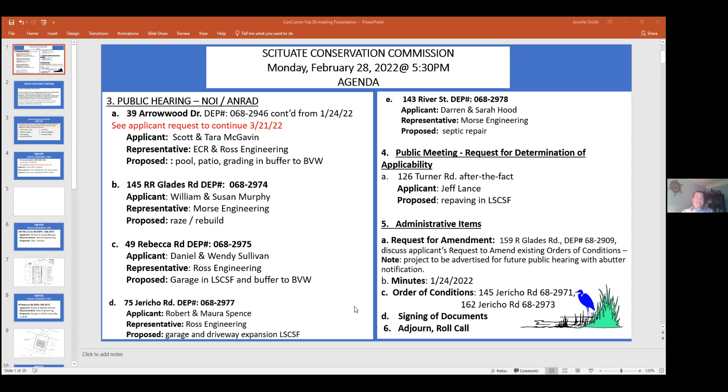So does that mean that there's a building in back of the rear building? You have an RR? We have Greg Morse on the call for this. Okay, good evening, Greg. Good evening.

For the record, Gregory Morse, registered engineer, Morse Engineering, representing the applicant and property owner, William and Susan Murphy. This is a notice of intent associated with the raze and rebuild of a single family home at 145 RR Glades Road. The property itself is relatively small, 2,736 square feet. It has an existing home on it. It's located in several resource areas, being a coastal dune on Glades Road, land subject to coastal storm flowage, a FEMA zone AE at 15. For reference, the site is at approximately elevation 9 and 10.

And then off the western portion of the site, at the bottom of the page here in blue, we've highlighted the edge of the salt marsh grass just off the property. So the proposal here is to take down the existing home and construct a new one. It's largely in the same location. The new home would be constructed on wooden piles. It would be brought into FEMA compliance. The first floor elevation would be proposed at elevation 16, providing a 1-foot freeboard to the floodplain elevation.

Also included with this would be construction of a new septic system. The septic system at the site today is likely Title V non-compliant, but the new septic system would consist of a Hoot aerobic treatment tank, a pump chamber, and a pressure-dosed leaching field. We were able to get the leaching field outside of the 50-foot buffer zone. The leaching field would be located under the new house, since the house is elevated up on pilings itself. DEP had no comments with this. I'd turn it over to you for questions or comment.

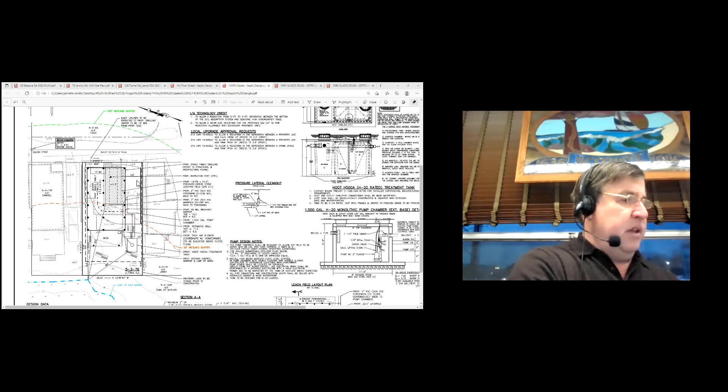I think I'm good. Seeing that we have the piling plan, we know there's no other structures or anything, I wouldn't be opposed to closing it. We could make it pending the rest of the structural information for the Board of Health.

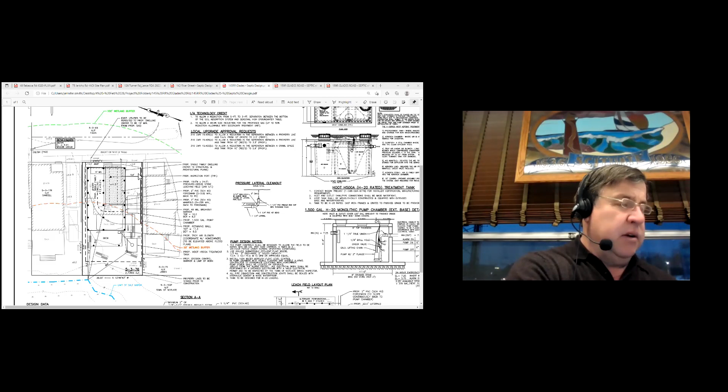If anybody wants to, I'll make a motion. Amy, are you good with that? Yes. So, make a motion to close pending waiting for the Board of Health and the structural plans to come in.

Motion from Penny. Do we have a second? Second from Jen. Great, all in favor? Richard, yes. Andy, yes. Brendan, yes. Frank, yes. Great, thank you very much.

Okay, 49 Rebecca Road. On February 28, 2022 at 5:30 PM in the Town Hall, the Scituate Conservation Commission will hold a wetlands hearing under Chapter 131, Section 40 of the Mass General Laws and Section 30700 Town of Scituate Code of Bylaws regarding the application of Daniel and Wendy Sullivan for work related to building a detached garage for a single-family dwelling at location 49 Rebecca Road, Scituate. Abutters and other interested parties are invited to attend. Information to access the virtual meeting is available in the agenda posted on the town website.

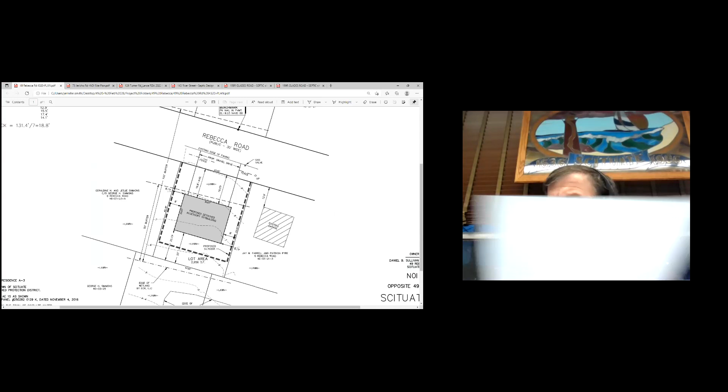Frank, I have Paul Mirabito on the line for this. Okay, hi Frank, good evening, Paul. Good evening. The applicant

resides on the opposite side of the street as the proposed accessory outbuilding at 49 Rebecca Road. The parcel in question is a vacant parcel of land with 2,956 square feet. It's been historically maintained as a lawn and a small garden area. On the southwest side of Rebecca Road, as you can see in photographs, there are several existing dwellings and garages there at the present time.

To the rear of the lot, there's a vegetated wetland line that was delineated by Brad Holmes, based upon soils and the groundwater. To the rear of that is a degraded old salt marsh, which has been overtaken by the Phragmites.

To the southwest of the locus, there's lawn areas on the abutting properties. The photographs I included in the notice of intent show that this site in question is an area where they also store the boats for winter storage. There's a construction trailer there as well.

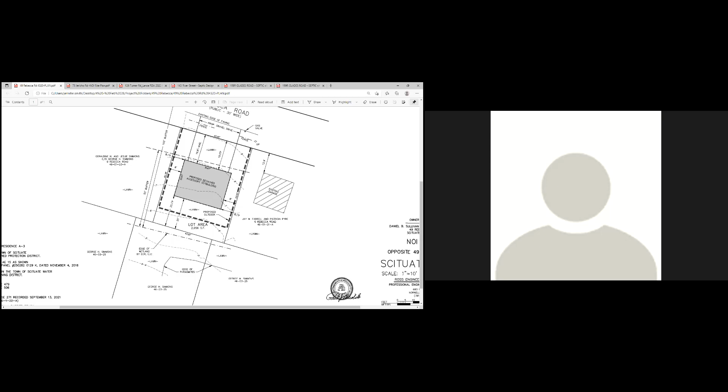Okay. Paul, I got a bit distracted there for a second—what did you say this is going to be built on? I'm just seeing a square. In an AE zone, I believe I submitted some structural plans for that. Just give me a second here. Yeah.

Frank, it's AE 15 mapped. No, the structural plans weren't in, but they're proposing to put it on a reinforced concrete foundation with a slab, as it's in an AE zone where there are no performance standards. The top of the garage slab would be approximately 1 foot above the street elevation, to give it slope back out to the street.

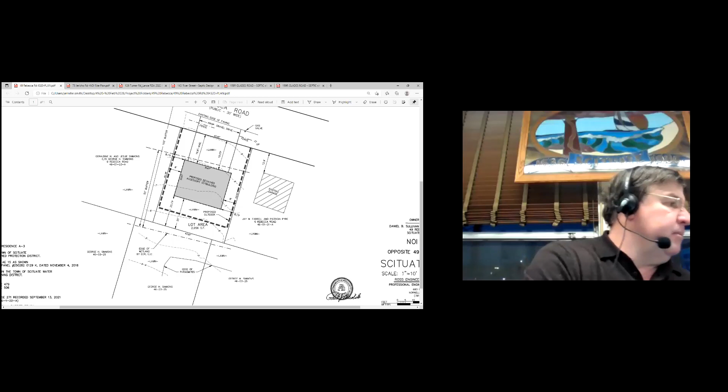The lot slopes from the street back to the rear of the lot. The street's at about elevation 8.5 to 9, and the back of the lot is at elevation 6. So I need to bring in fill to raise the lawn area.

The land around the garage will remain as lawn, with the exception of the proposed driveway coming into the garage, which is a gravel driveway. The placement of the garage would only allow parking of 1 or 2 cars in front of it, whereas now they're parking several boats and other vehicles on the property throughout the year, especially in winter, as the photographs show. But once the building is there, the only parking would be inside and in front of the garage.

Penny: Thanks, Paul. That's a big garage. Actually, it's 30 foot 8 inches by 23 feet 8 inches.

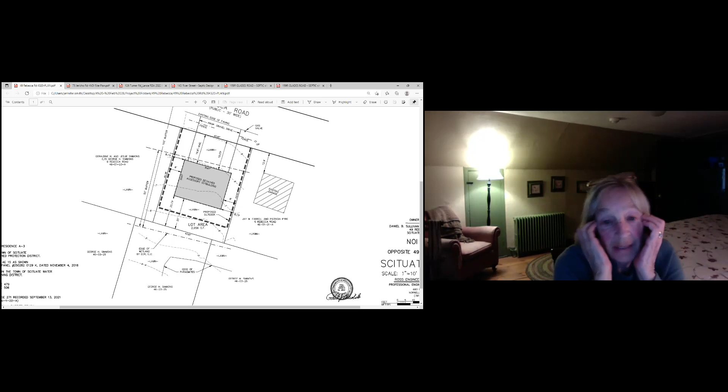To me, that's big. You look at the garage next door. But anyways, I don't know, I know there's other ones over there. I don't know if it's a good idea or a bad idea. I know every storm it's going to be flooded. It goes right into the marsh, the wetlands, whatever you want to call it, between the houses on the front and back of the harbor. I don't know, I'm just going to pass. I don't know if it's a good idea or not.

Jen: I would echo Penny's sentiments and would just want Amy to have the opportunity to do more due diligence on it.

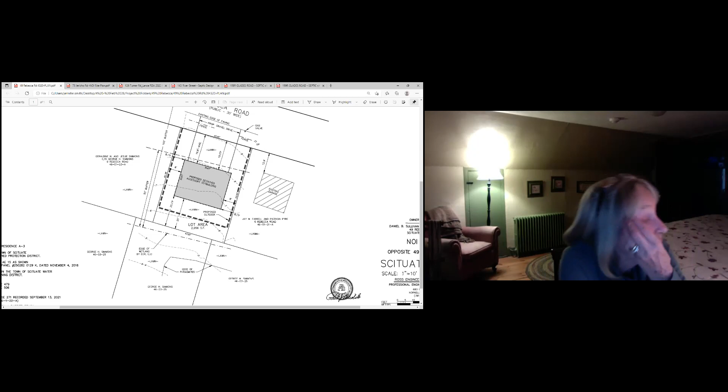Andy: I feel like I'm fairly consistently hesitant about these storage units in flood-prone locations, and this is the biggest one I've seen yet. So I guess I've heard the concerns about it, and I share them.

Brendan: Yeah, I agree with everyone that I'm concerned about this. I don't know that it's a very good idea. But I don't have any specific questions at the moment.

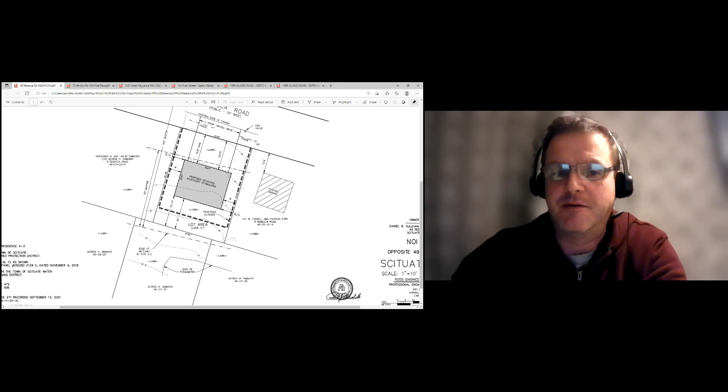Okay, so Amy, what you alluded to, maybe confirming the resource area, wetlands line.

I think I would start my approach with a little more diligence on the flood hazard area. Because if this area is really actually in the limit of moderate wave action, which isn't on the plan, it shows that it's right on the edge, but if it really is within that LiMWA area, then it wouldn't be a question about whether or not it would be permitted. Another thing that's missing is sediment information, as far as whether this is sandy underneath or more till. So I'm not sure exactly what the resource area is.

So that goes for accuracy of the resource area, and also proximity of the buffer to the BVW. Looks like that area, given it weren't filled on that side of Rebecca, that probably that entire stretch would go to the road. The literature and studies that the town has performed in this area all show that this area is going to be under water on a regular high tide cycle in the not so distant future. So permitting a new accessory building in this area would not be the best decision.

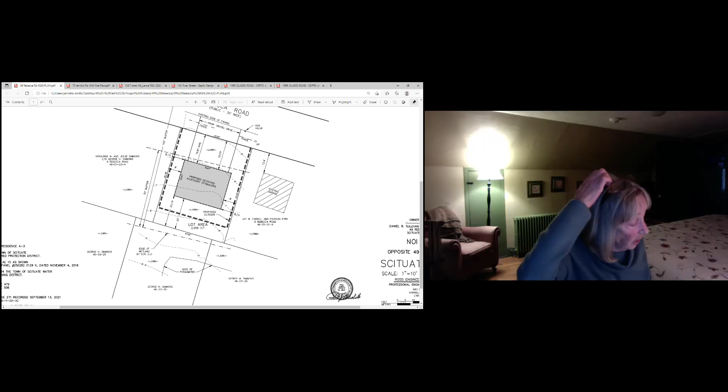Well, a lot of these structures, Penny, were for sure totally demolished in '78. Oh yeah, that was interesting. And in fact, the owners of this property - the Cape directly across the street - is on a solid foundation, but it was rebuilt in '78 following that storm after they lost the house there. But I don't think records show there was ever anything on this lot. No, and there's a number of other empty lots on Rebecca on this side of the street.

All right, Frank, what are your questions? It's also in the Scituate floodplain, which is a zoning reg.

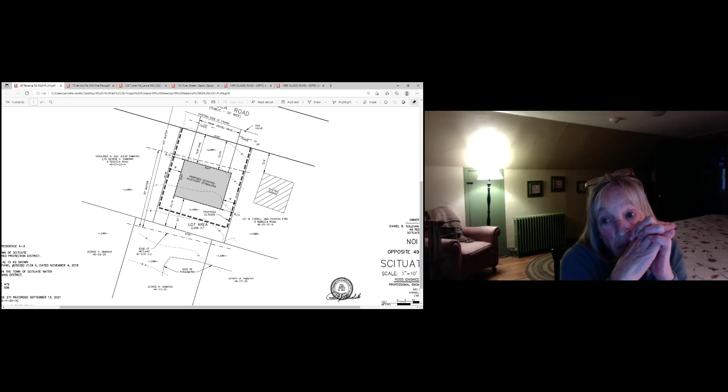So Paul, does that impact, Amy? Well, the Scituate floodplain watershed protection district says anything less than 12 feet is not buildable, not permitted to be built upon.

I know, Paul, if I can interrupt, that's not correct, building commissioner. Paul, let Amy finish and then you can address that.

Well, okay, anyways, there's a map, and if you're in this area of the watershed or floodplain, and you're mapped in that area, then there's special provisions that apply that would prohibit building. Oh, okay, thank you. Paul, do you want to respond to that?

Yes, I'd like to make a few comments. To respond to Amy's last comment, in the zoning bylaw, in the floodplain and watershed protection district, you can construct an accessory structure as a matter of right. That's in a separate paragraph in section 470.

The other thing I'd point out is that the first floor of this will be about a foot above the existing grade. There's no proposed living space in it. As such, the first floor does not have to be brought up to the AE elevation of 15. There would be breakout panels on the wall to let water flow in and out as required.

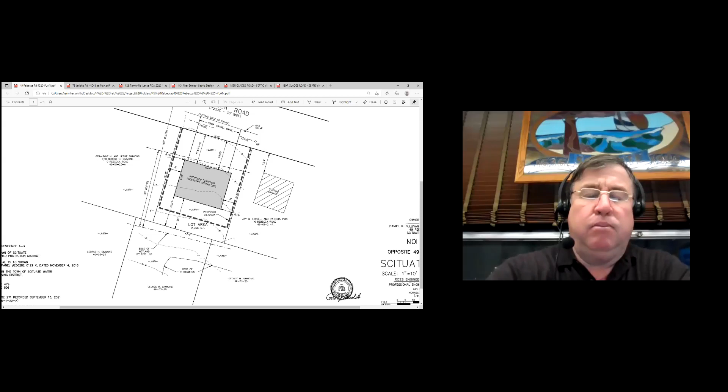So Amy, if we're going to ask Paul for additional information, I'm just wondering what we just... Well, sure, how about if you start with a site visit and reaching out to coastal for a technical opinion from CZM about the flood hazard area.

Well, and the flood hazard area has already been determined. I mean, that's been set by FEMA on their 2016 map, and it didn't change. The maps were revised this past summer, and there are no revisions made in this area.

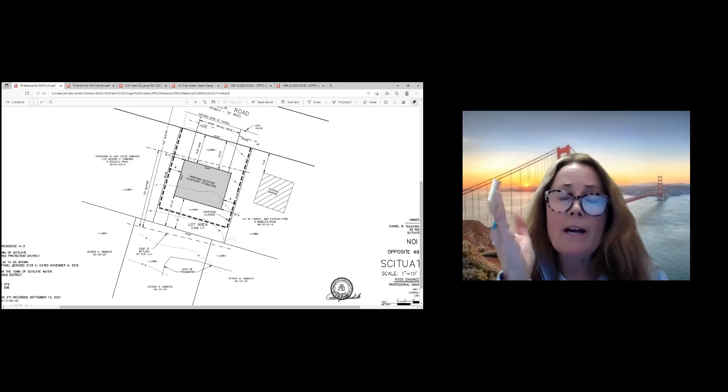I mean, again, actually, there are mapping errors, so I'm not sure if this is in an errored location, like it's faulty in this spot. So on-site evidence can overcome the FEMA panel.

And I'm not sure why CZM needs to get involved. I don't see any reason for it. I think this is a straightforward application. And again, this is in an area that's already been altered. It's been maintained as a lawn and a garden for several years.

The proposed building isn't going to alter the resource area. The runoff from that roof is clean water, and the surface of the ground is going to be kept the same as the lawn. So with the addition of the roof area with clean water versus the lawn, there'd be no degradation of the Phragmites, which you all know is a very invasive species. That's probably why some of the neighbors have been cutting it back over time. But this building would not have any negative impact or cause any alteration to the resource area to the rear of the property.

So Paul, this isn't on piers. This is a poured foundation with a concrete slab inside the building. Yes, that's the plan because it's in an AE zone.

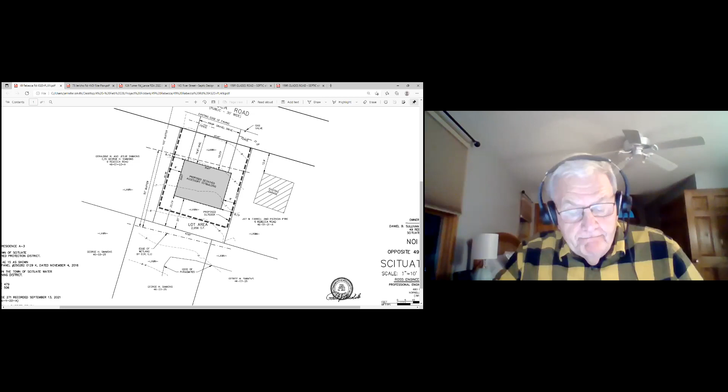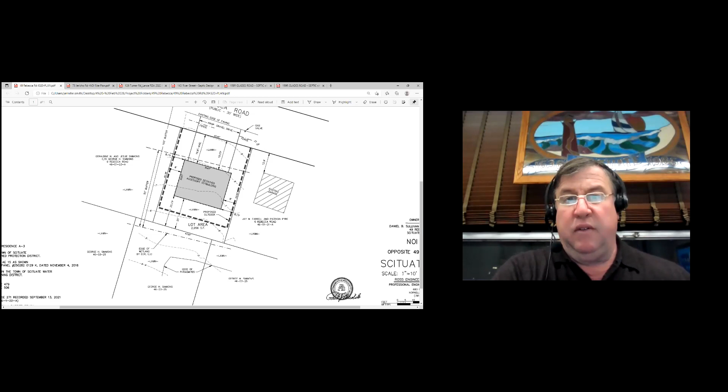Is that Richard? Yep. Okay, I feel pretty familiar with it already, but if it works, we'll be there. We don't have to do it formally. Anybody could take a ride by, but I'd like to maybe visit it with Amy and Paul if you could be around. Just seems like it would be good if Paul were there or somebody from your office. Yeah, I'd like to be there.

Well, I'd like to walk it, Frank. I mean, I drive by it all the time when I go out to the lighthouse, but I'd like to walk it. I'm just wondering, I don't like the slab at all. I think we need to take a little field trip. Thank you. All right, let's see what we can set up.

Is it relevant whether or not the accuracy of the flood hazard area — you know what I mean? Is it always true that the maps are accurate? What determines that, Amy? Is it an elevation line, or Paul, what makes that line? What gives us that? How do you delineate that?

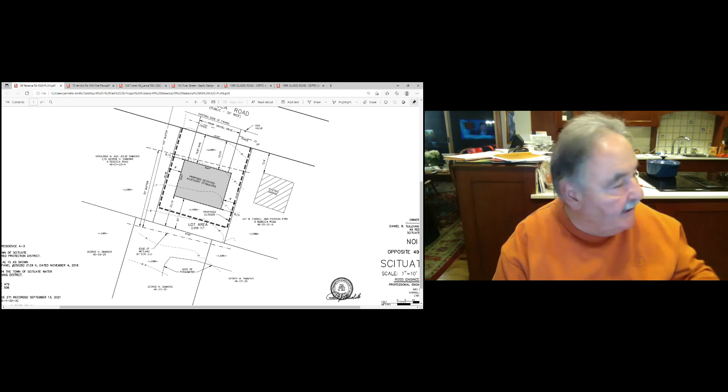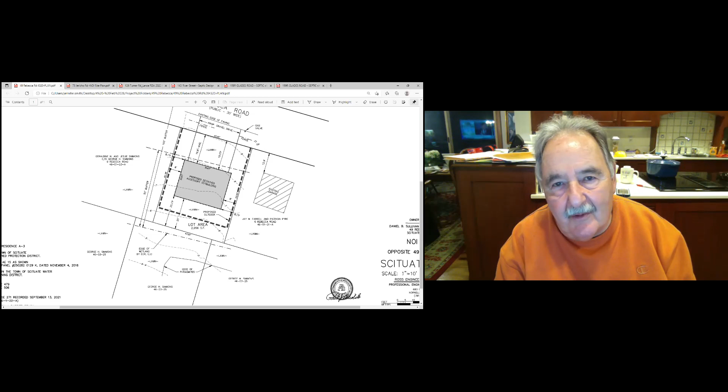The FEMA maps — that's the line on the map. It's not an elevation. The FEMA map shows this whole area to be in an AE zone. The line separating the velocity zone from the AE zone is on the other side of Rebecca Road. That's why we put the note on the plan, note number 3, saying that the locus is in zone AE 15. If the FIRM line or FEMA line went through the property or close to it, we would show that on the plan, but it isn't anywhere near this lot. It's on the other side of the road toward the ocean.

So when do you want to continue this to and try and get out there? April 4th? Okay, wait, you're saying continue this to April 4th?

Amy, that's what I'm saying, based on the volume of filings that we have in front of us. Yes, 4/4.

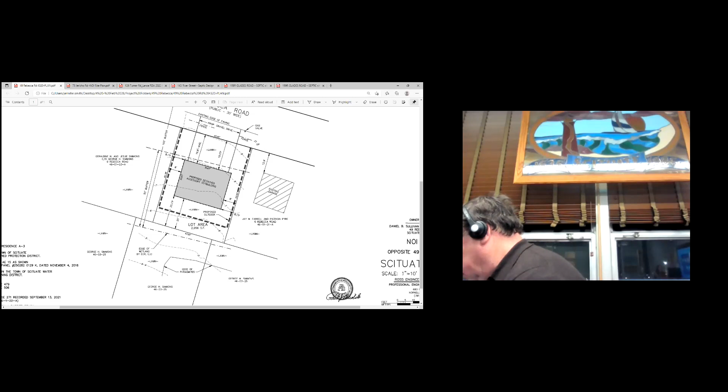What do we have for meetings? That would be 3 meetings away, Frank. So we have one next Monday as well, and then another one on the 3rd. Monday. All right, well, you don't think we can get that in before that?

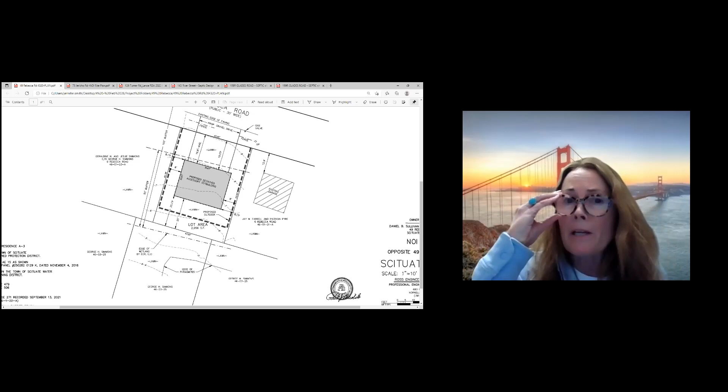Amy, we already have the agenda set up. We have our agendas set for the next couple of meetings, Frank. We have just been slammed with new filings. All right, well then, let's do it for the 4th and let's try to get something set up in the next couple of weeks, so we have time. And then if Paul needs to get some information, he can get it to us so that we don't have to push it out again.

Sounds good. Okay, so I'll make a motion to continue 49 Rebecca to April 4th.

Okay, that was Penny. Do I have a second? Second from Jen. Great. All in favor? Richard, yes. Andy, yes. Brendan, yes. Frank, yes.

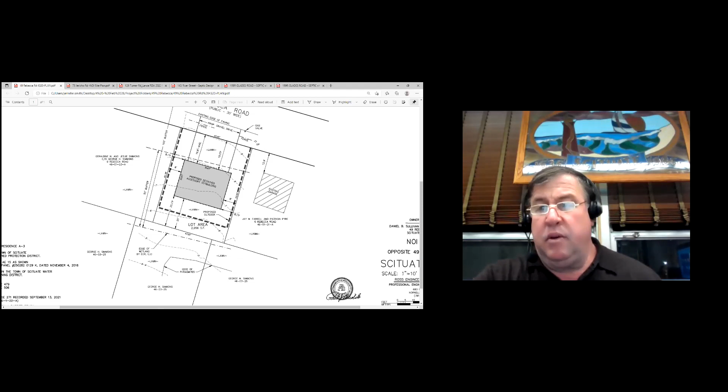Okay, let's maybe, Paul, you can reach out to Amy and me so we can get a time set up to go out there. Okay, thank you. All right, thanks, Paul.

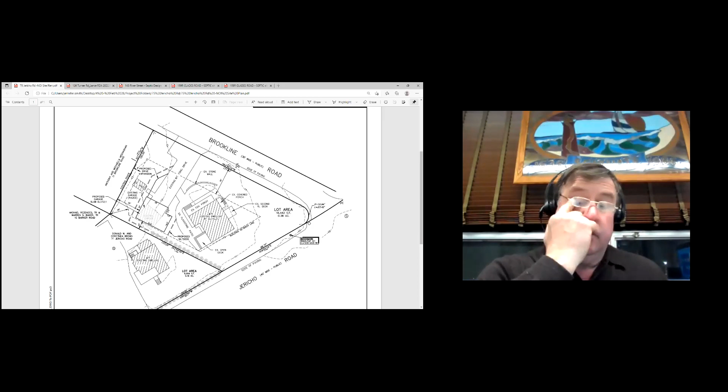Okay, thanks, Paul. Amy? I think this one's pretty straightforward, and no DEP comment. I don't have too much to say about this one. I mean, the structure will definitely need to meet coastal building code, but otherwise, probably okay.

Okay, who wants to go first? Andy? I think I'm good on this one. Brendan? I have no questions.

Penny? Yeah, the proposed extension of the driveway, that's going to be the same material, right? Yes. Okay, no, otherwise it's just a little bigger garage. It looks okay to me. Thank you.

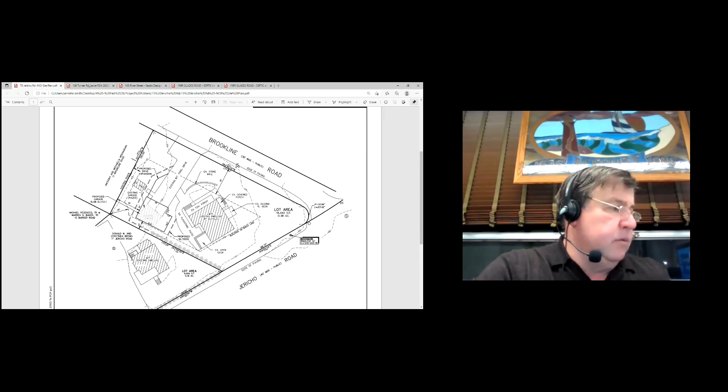Jen? Yeah, I think I'm okay. Richard? I'm okay also. Do we have anybody in the audience for this one? Doesn't look like it.

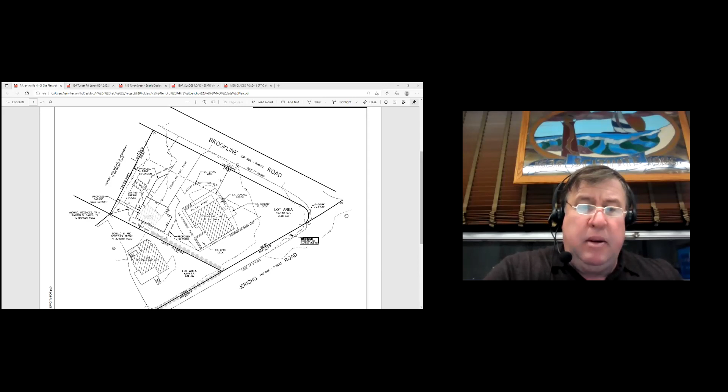Is there a locus for this one? Yeah, there's a locus map on the plan. Got it.

Just trying to get oriented with where they keep the docks and stuff for Scituate Marine. There was, and the fuel tanks on the other side of the road, Paul. I don't know if this is that. Maybe I'm in the wrong spot, I guess it's the other side. It's between Pearl Road and Jericho is where that's at. I got it. Okay, yeah.

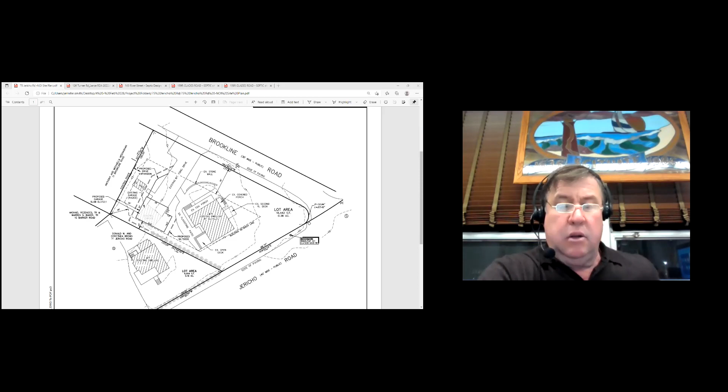Yeah, this is not in that location. This is in... no, that triangle, it's just above it. I get it. Okay. Just want to make sure Paul's looked it all over carefully. I don't want you to get lost, Frank. Yeah.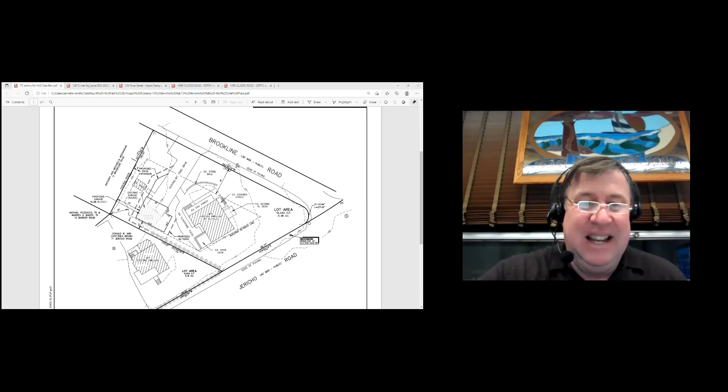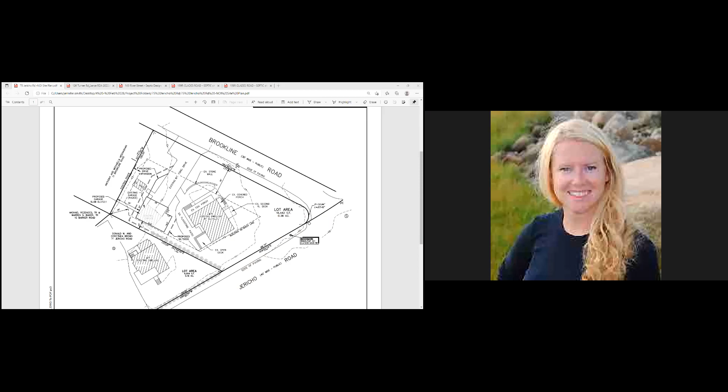All right, can we close it? You may. I make a motion to close. Second on that. I'll second it. Second from Jen. Oh, Richard beat me. Sorry, I'll take that one from Richard this time. So all in favor? Jen, yep. Andy, yes. Brendan, yes. And Frank, yes. Great. Okay, thanks, Paul. Thank you very much.

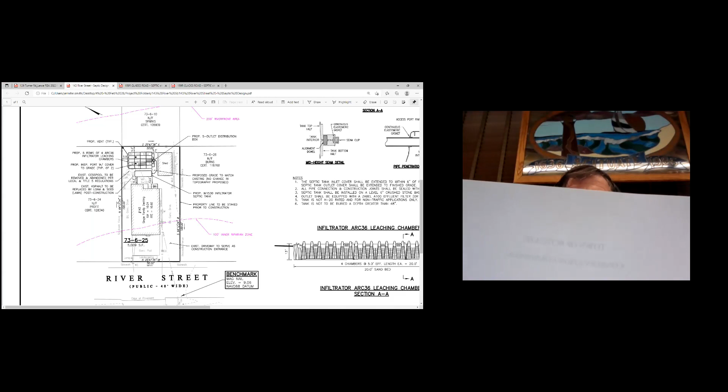143 River Street, on February 28th, 2022, at 5:30 PM in the Town Hall, the Scituate Conservation Commission will hold a hearing under Chapter 131, Section 40, Massachusetts General Laws, and Section 307.00, Town of Scituate Code of Bylaws, regarding the application of Darren and Sarah Hood for work related to a septic system repair for a single-family dwelling at 143 River Street, Scituate, Mass. Abutters and other interested parties are invited to attend. Information and access: the virtual meeting will be available on the agenda posted on the town website.

Wow, we've got Greg Morse on. I'm going to unmute him. Good evening, Greg Morse, registered engineer, Morse Engineering, representing the property owner, Sarah and Darren Hood.

This is a septic system repair project at 143 River Street, which is down in the Humarock section of town. Looking at the screen here, River Street's at the bottom of the page. Below River Street would be the South River, a tidal river, and extending off of that, highlighted in purple, are the 100-foot inner riparian zone and the 200-foot riverfront area. The existing site is relatively small, depicted by the black bold line. Existing home at the site has a failed septic system in the backyard. The proposal here is to put a new septic system in its place, consisting of a 1,500-gallon septic tank, a distribution box, and leaching chambers.

With respect to the wetland resource areas, septic system repair projects are exempt from the riverfront standards, and all of the work anyways is outside of the 100-foot inner riparian zone. Secondly, being in land subject to coastal storm flowage, this is in zone AE at elevation 14. For reference, the site exists at elevation 10. With the proposed septic system, we're not altering the grades at all. The finished ground surface matches the existing ground surface elevation at the site, so there's no change in topography. I would add that the area where the septic system is proposed is currently paved surface. We're actually removing that pavement when the septic system goes in, so the backyard would be replaced with just loam and seed, a grass surface, when the project is done.

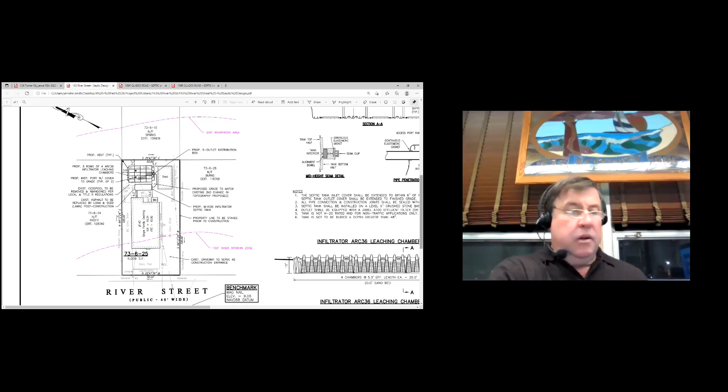Richard, there's your neck of the woods. Strictly from the standpoint of the improved septic, it's really good - very small lot, very tight. It is across the street from the river and behind another house. It's kind of the inland part of the beginning of the peninsula, and no, I don't have a problem with this particular part. Okay. Penny? No, I'm happy.

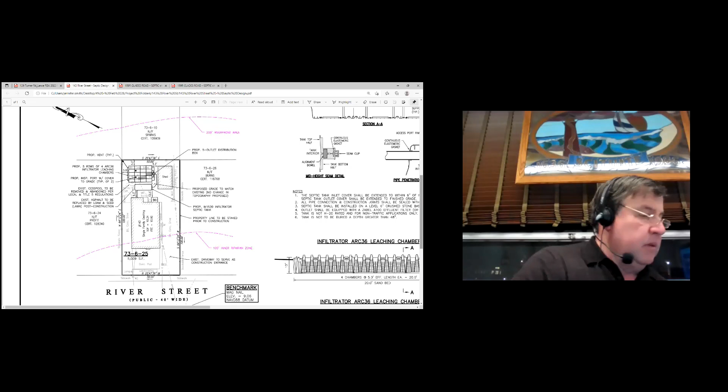Okay, Andy? It looks good to me. Brendan? Looks good.

Jen? Yeah, I guess I just had one question. Amy made a comment about the other side of the road that the same person owns not being in compliance. Just wondering how that might relate to this getting done, if they could be linked, or what the strategy might be there.

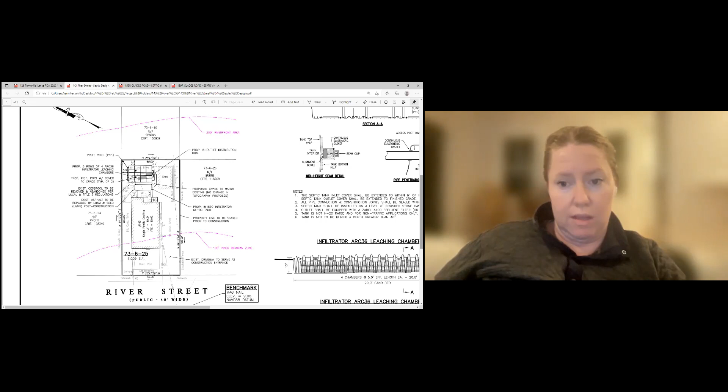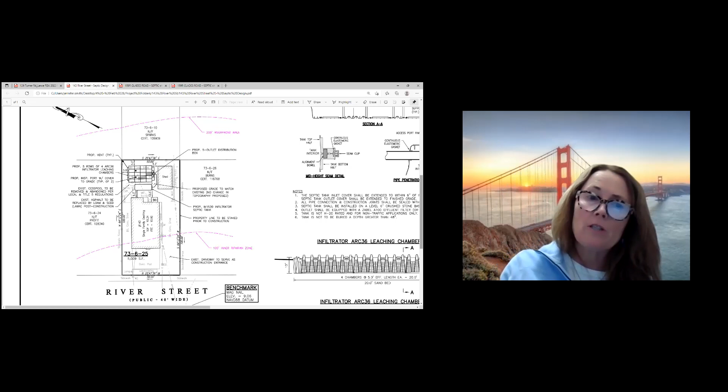No, Jen, not linked, but it would just be a good opportunity to bring up to the owners, because it looks like it's changed ownership, that any work on the river does require permitting. Anything seaward or on the other side of a wall is Chapter 91, so a waterways permit. So it's a good opportunity to have the conversation and engage so we can try to bring things into compliance across the street. Are they out of compliance?

Yeah, I mean, it looks like there's some sort of wall type thing going on, but I think that's also related to the neighbor.

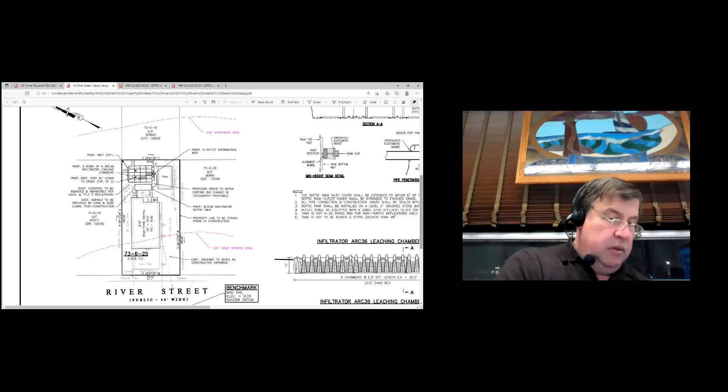Rich, would you think that most of that's been there a while? Well, the house is definitely old, that whole area. Yeah, Amy is right, it's probably from the 50s. And the same would be true across the street?

No, across the street, that house actually, I think - and I have to emphasize the word think - we had issues with the former owners of that house maybe 7 or 8 years ago when I was first on the commission. But I don't think it's the same owners, and I'm not sure that there's any new wall there. The wall that I can think of that's there is at least 10 years old and probably older.

Yeah, and we got no relief on that. That's correct, that's why I say, but I don't think it's these owners. They may own it now, but I don't think they did at the time. Yeah, the Army Corps of Engineers never came to our rescue on that one.

Correct. Yep. You remember that, Frank, when we had that issue? No, you and Penny must be - you remember it. It was there before I was. I thought you guys were eating more blueberries than I am or something.

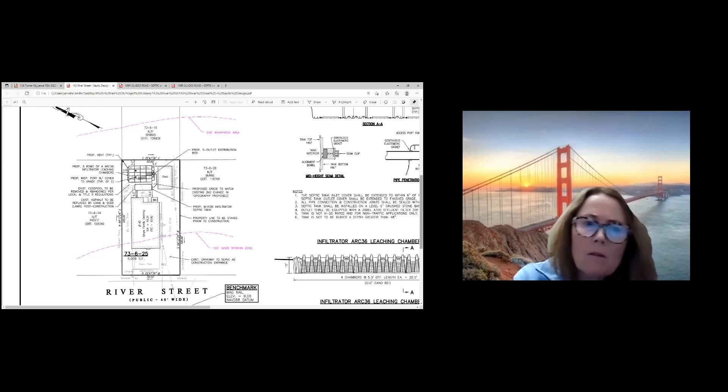Somewhere in this stretch, there's that illegal boat ramp that was put in, you know? Well, there's a concrete ramp that's showing on this plan. Yeah, well, that was there. But there was the wall behind the house. That's right, and there was a controversy about the Army Corps.

They weren't supposed to put it there, and they never did respond. Paul, when he was on the commission, had huge issues with that, and he was right because he watched them do it. Yep, and the Army Corps was supposed to come down and they never came.

I don't know now where the ramp is, and then south of there, this man's property, I have no idea what's going on there because I haven't been down there lately. No, there's been nothing recently that I know of.

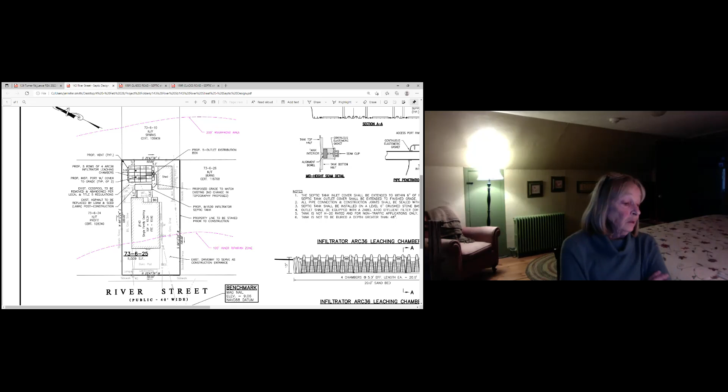Okay, but I think we also - I like the idea of Amy bringing this up on the one hand. On the other hand, this particular project across the street, separately, I just don't see an issue. Yeah, well, we could just tell them - yep, I think we just did - make sure you don't do anything over there unless you come to us.

I'll make sure the applicant's aware of that. Thank you, Greg. Greg, I got a few questions. I mean, I'm looking at this lot and almost the whole lot is either concrete or asphalt. That's correct, it's paved from one property line all the way to the other. The entire lot is paved.

Out to the street. Yep, right out to the street, right to the rear lot line. So Frank, we're removing the asphalt where the septic system's going and putting in grass in the backyard. Oh boy. So from the back of the house, you're gonna have to remove the asphalt for the tank and up to the shed. So that whole corner from the back of the house to the property line will be a grass surface.

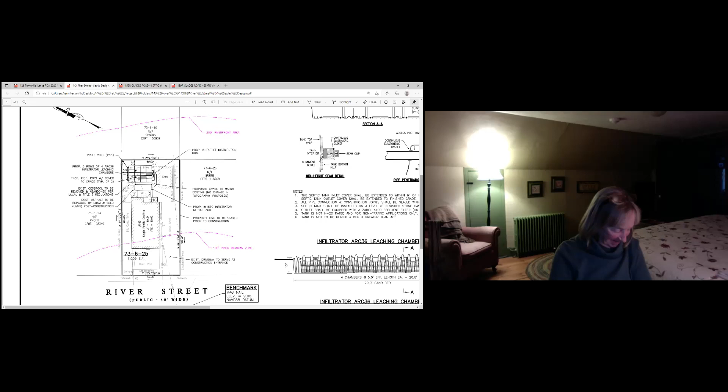What is an IM 1530 infiltrator septic tank? That seems different than - it's a plastic septic tank as opposed to a concrete septic tank. Oh, just because access to the backyard is limited, the only way in is between the shed and the house, which is only about 6 feet in width. So this would all be done with like a mini excavator, smaller equipment. It's a plastic tank is the short answer.

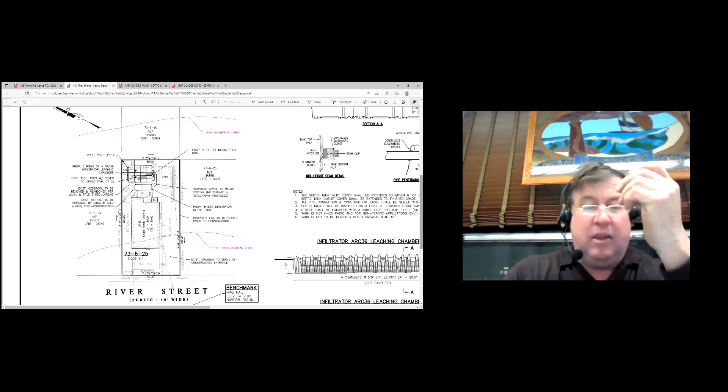Okay, and so they will maintain a small lawn or something back there. Correct. Well, I guess, yeah, in both cases, emphasizing to folks that the commission's trying to get more pervious areas out there.

Frank, go ahead, a 30-second history lesson for that end of Humarock. Most of those houses were originally just summer cottages, built back in the late 30s or maybe up to the 50s. At that time there were no restrictions on putting in concrete, and many of the lots are almost 100% concrete.

Or maybe have a few roses around the edges. We've dealt with this a few times in a few places where we've insisted previously that they make places for plantings and stuff like that down in that end of Humarock. Well, I guess if they were looking for a new driveway or something, I'd be insistent.

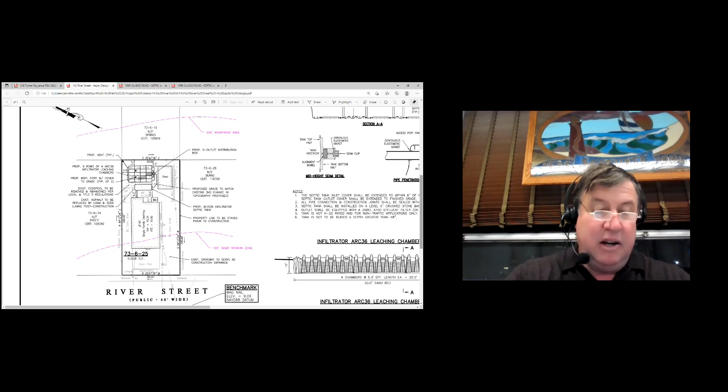I think your point is absolutely right at the beginning, to have an upgraded septic system is mitigation in itself, but hopefully people will start to see the benefits of not having a totally asphalt yard. You're right, and anytime we get the chance we should push on that. Just looking at it, thinking, oh God, there's nothing between the concrete pad and asphalt. Oh Lord, well, whatever you like.

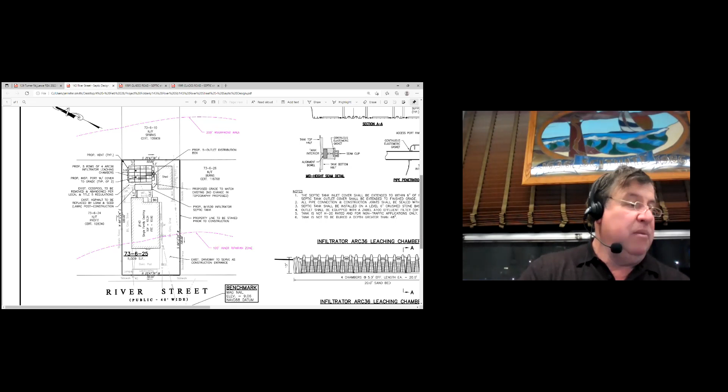Okay, so I guess I'll take a motion. Make a motion to close. Second. Second, Andy. All in favor? Richard, yes. Jen, yep. Brendan, yes. Frank, yes. Great, thank you. Thanks, Greg.

Okay, moving on, so 126 Turner Road, after the fact filing. Amy, do you have something to read? We're opening it, so do you have something to read? Jen's grabbing a sheet, I don't even have another one I could wing it off of. Thanks, Jen.

On February 28th, 2022, at a regular 5:30 PM meeting, the Town Conservation Commission will act on the request of Jeffrey Lance for a determination of applicability to the Massachusetts Wetlands Protection Act and the Scituate Wetlands bylaws for activities related to repairing pavers by the front entrance and repairing a driveway with concrete over crushed granite rock at the dwelling located at 126 Turner Road, Scituate. Abutters and other interested parties are invited to attend. Meeting information to access the meeting is available on the agenda posted on the town website. So who do we have on for this?

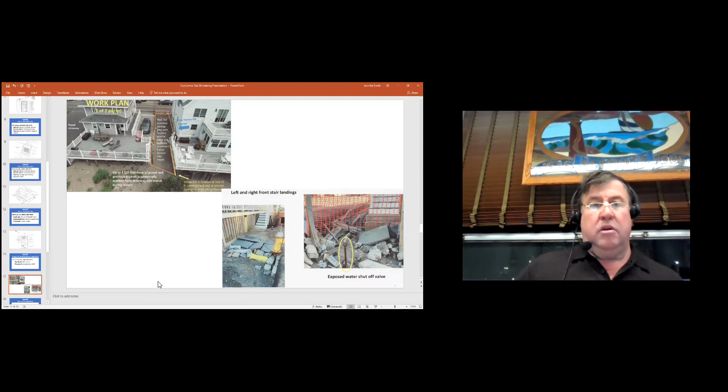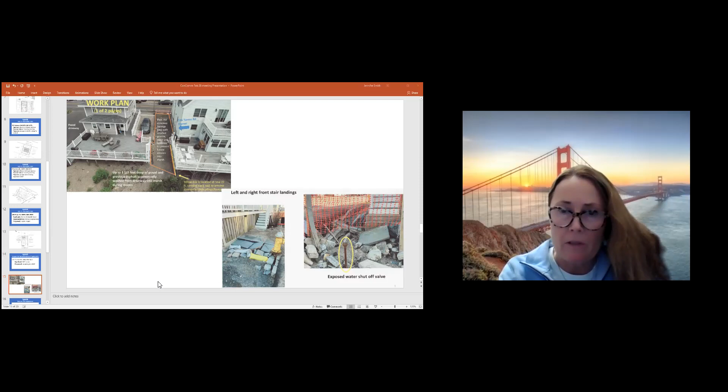Looks like Jeff and Wendy Lance, I'm going to unmute them. Just keep in mind this is an after-the-fact filing, so hold on, they've already done the work. Okay.

Okay, you're on Jeff. All right, thank you. Yeah, my wife is here too, it's just for whatever reason it's not showing up. I guess it's smart enough to only pick out one person. But yeah, so I think you got the basics.

And I mean, this is basically, words can't probably describe how much water has run off through there from our storms. We bought the house about two years ago, and since then we had the storm of December 17th, then February 2nd of last year, then October this year, and then obviously the blizzard we just had.

Starting back in August, I began a dialogue with the Conservation Commission's office. I was interested in finding out what I had to do to do this right. Visited the office, Jennifer was very helpful, answered my questions and gave me the current site map that we're looking at. I then began trying to get estimates from contractors, and during COVID that was kind of difficult, but finally two contractors did visit the site and eventually provided me estimates. They basically said, based on the history of storms and the damage that was already done there that they witnessed...

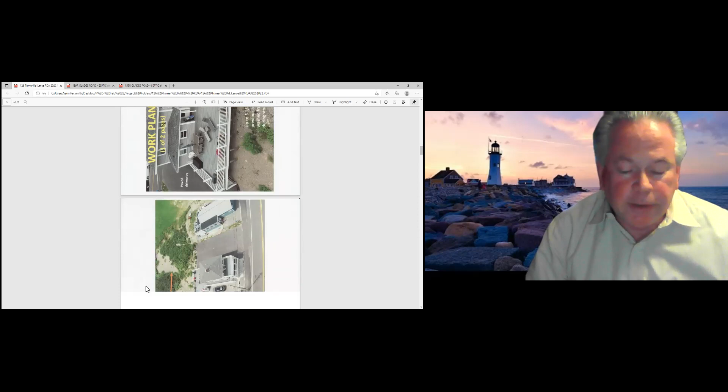The contractor I agreed to said that unless we got started by the end of November, he wouldn't have enough time to get the work done and get concrete in so it would properly cure. So I went ahead with the work, knowing that if I went through the commission process, it would probably take at least 4 weeks and I'd lose my window.

And knowing we'd probably have another storm, which we did, our blizzard on January 29th, I'd get more erosion. So I got the contractor and we started working on December 1st. He finished the work on December 22nd.

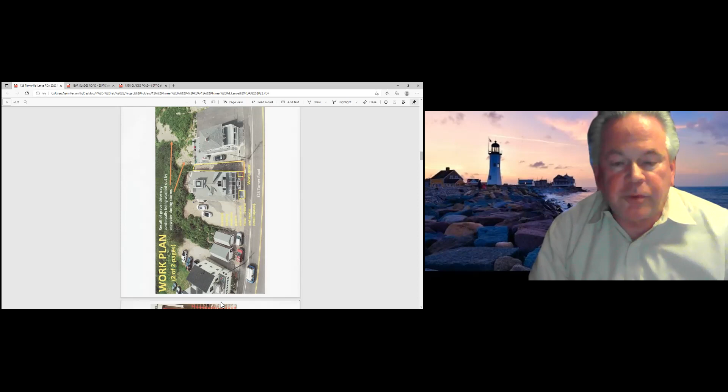I was down in Scituate the whole time for the work. When I got back, I was happy the work was done, but unfortunately we had received the notice of violation on December 24th. So at that point I contacted Amy's office again to figure out what I needed to do. That's kind of where we are.

You could see the damage on the property. The driveway was previously gravel, but underneath the gravel, after the first couple of storms, it was all asphalt. Huge chunks of asphalt were there.

I talked to my next door neighbor, and she said, yeah, it was asphalted. Hers was asphalted at one time too. The storms I had, around 2015 or so, wiped it out. It's all huge chunks still there, and you can still see some of them in the marsh that got pushed down the driveway.

The good news is, on the 29th, when we had the blizzard and the water came over the seawall again, I was down there, and the water came down very uniformly. Unlike before, when it was coming down through the gravel about 3-4 feet deep and 4 or 5 feet wide with quite a bit of velocity, now it was coming down uniformly, only 3 or 4 inches deep.

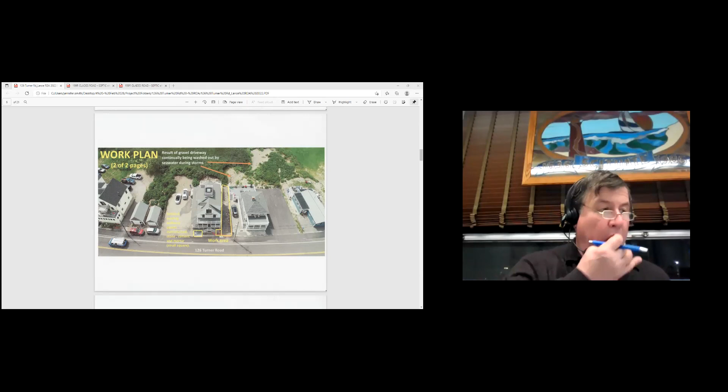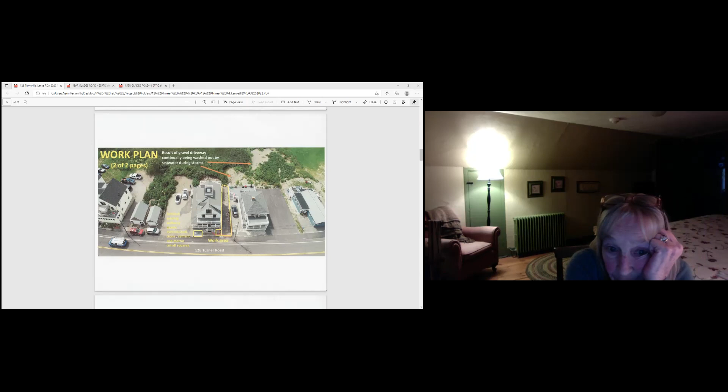It's kind of a case of you're damned if you do, damned if you don't. I don't remember letting somebody put down new asphalt over there, Amy, so I'm a little confused there. I do sympathize with his predicament. Those pictures are terrible, how his driveway was dug out. I wish he had followed the proper procedure he started, and possibly we could have worked something out. But there's definitely been a violation here, so I really don't know how we're going to handle it, because he blatantly went and did what he wanted to do without coming to us. I understand his predicament, but it's sad because I don't want this to happen again. We do try to work with people, sir. We're not here just to be bad and make you do everything exactly the way we want it. We do work with people. And this is a really unfortunate situation. But I don't know what to do. I'm really in a pickle, because I feel for you, but on the other hand, it's a no on what you did, sir.

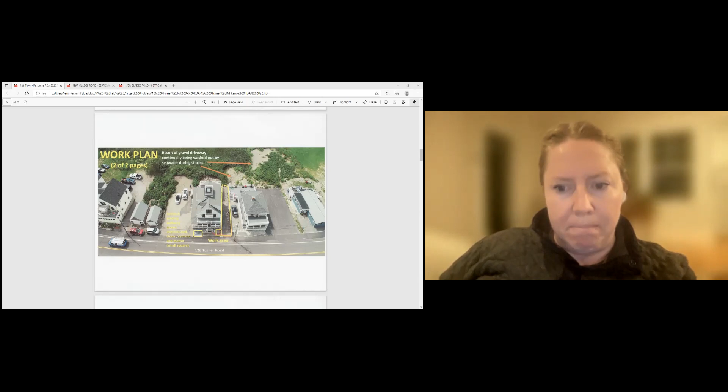That's me. Okay. So I guess that's the gist of the commission, Mr. Lance. I think people are sympathetic to the problems that you're having.

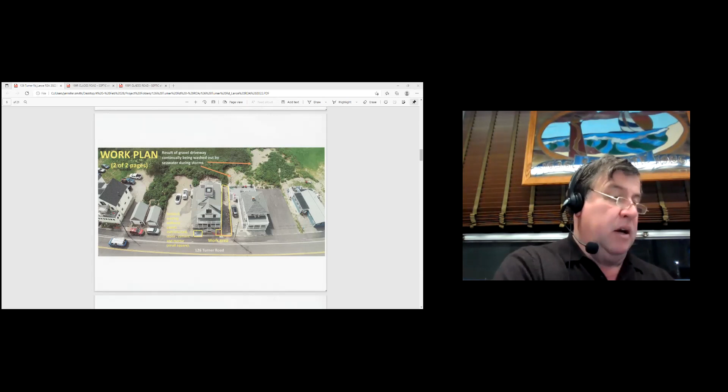But I also think there were probably some ways this could have been done that would have been more in keeping with how we're trying to deal with issues in that area. In most cases, we're trying to avoid impervious surfaces. You're saying that big paved area on the house next to you is a good idea because the water sheets down there, but a coastal geologist would tell you that just speeds up the water and moves it further down, and they wouldn't condition it that way. There'd be some kind of material, stone or whatever, to absorb some of that water so it doesn't just get moved on. If there were other people living behind you, they'd be the recipient of all that water. In this case, it doesn't happen to go that way.

Personally, if this had come before the commission, we would have looked at this area. The reason your neighbor probably has pavers on the other side is because that might have been something the commission requested, that it not be a solid surface but some sort of surface that allows infiltration. And then the need to carry that concrete all the way past the deck in the back - if the concrete had gone partially there and then some sort of riprap or other material that might not have washed out as much, instead of covering such a large area with concrete, that's something I think the commission would have discussed with you.

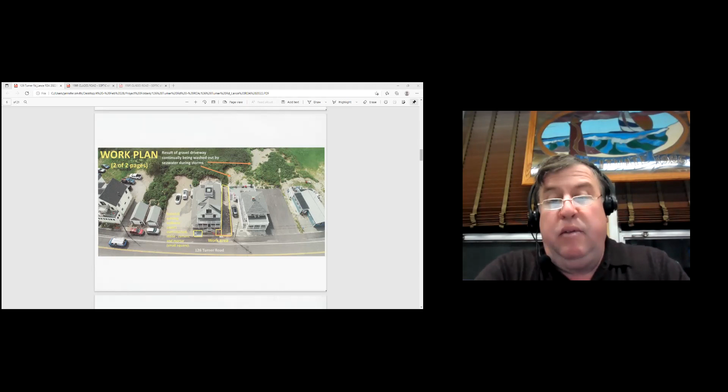My feeling would be that it's too bad at the end of this area that you paved, that you didn't create an area of larger stone or something that would slow that water down or help it permeate. I know in a real bad storm a lot of it doesn't matter because everything's just going everywhere.

Actually, I did. I thought I mentioned that in the work plan, but I have a picture, probably the last picture in the package, that shows the bottom of the repaired driveway with 6-inch riprap. I went back because I didn't want to take it upon myself to start doing that sort of stuff, but I thought it would make good sense to put some at the end of the driveway. Very little of it actually washed away in that last storm, which was kind of my sign that this actually works, whereas before that stuff was washing down there and there was a gully, all the way down to where you see that sand deposit in the upper right.

So that's where you can see some of that in the picture, it still looks like this earth and stuff gets washed down there. I'm just wondering if more of that riprap could be placed there, at the end of the driveway, to stop more erosion.

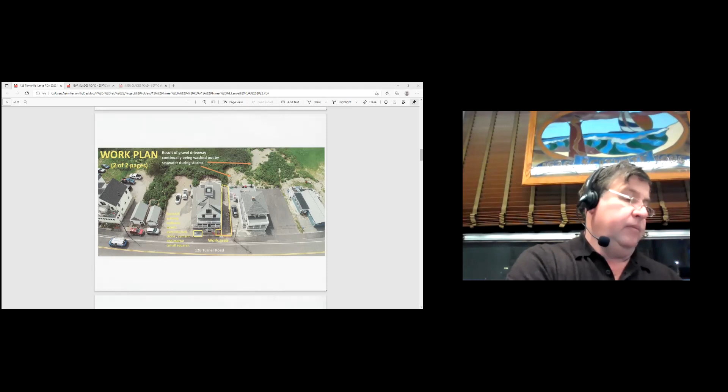I certainly could, if that's a decision. The water's still going to come down there, so it's going to get to the marsh one way or the other, but certainly that could help slow it down.

Anybody want to comment? Anybody else? I think I'm good. One thought, Frank.

If we had done this the right way, we would have required a delineation of the resource area to base our decision. And so even now we're sort of making this blindly without that delineation. Is it helpful to have it delineated and see what we're working with as a step?

And then my other question, seeing that wall now, which I understand was put in to protect the deck pilings, but if I'm looking at the pictures right, it looks like that's sending water over to the neighbor's deck pilings. So I'm concerned that wall is actually pushing a problem with this deck to the people next door. Those are the two things I've thought about recently.

Yeah, I did actually, with permission of my neighbor, I had the driveway extended over a little bit to fill in some of that. But yeah, certainly some is getting over there. But based on what I saw in the storm, it seems like most of it kind of flowed straight down the driveway and off the end of the concrete. But possibly there's something better that can be done there as well.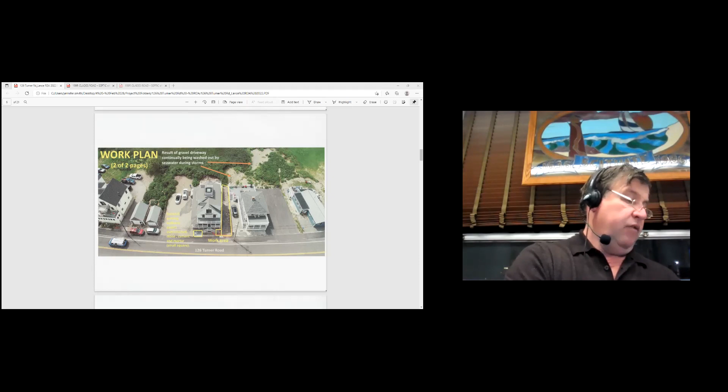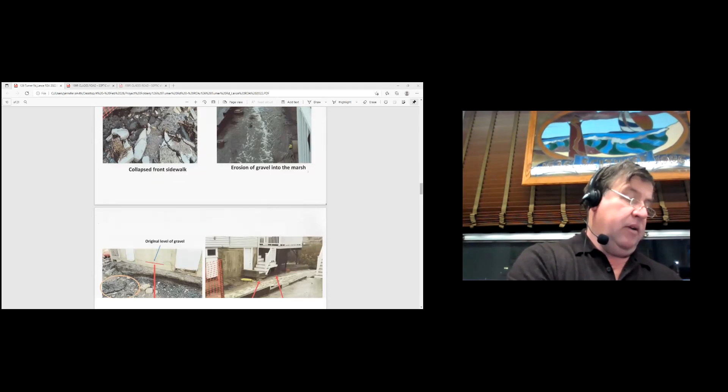There's a wall that seems to separate your driveway from your neighbor's. It's a little hard to tell in this picture, but I'm looking at one with water flowing in the two driveways, and your driveway has more water, but there's quite a bit of water rushing between that wall and your property, while on the neighbor's side there's very little. Just that cement block wall that separates the two of you, do you know if that's yours or your neighbor's?

Yeah, so probably if you went back to the picture of the damage, you can see that wall better. It's wooden underneath there, like 6x6s. That was my neighbor, she had that put in when she had her driveway done.

Is there anything that really separates your driveway and your neighbor's now, or are they just joined? Yeah, well, she's got her driveway which is the cobble, and right down the middle of that she's got cobblestones that stick up about 4 inches. Then from about where it says completed driveway on the left, up to the street, she has 6x6 timbers in. It's only about one high because they're all buried, but that wall goes down about 3 feet, which was needed to build her driveway up, and when that was done, to keep it from collapsing I guess.

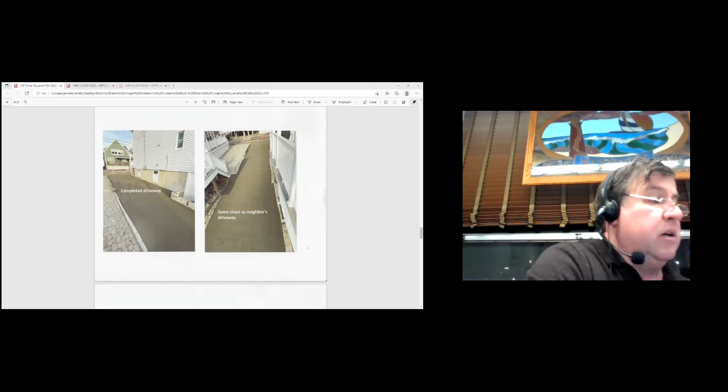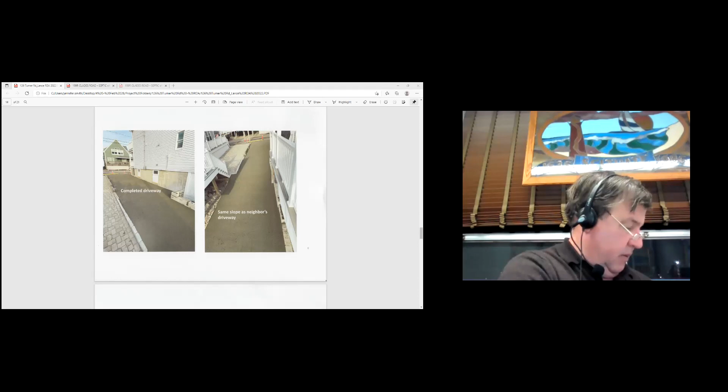I'll second that, it's Brendan. Thank you, Brendan. All in favor? Richard, yes. Doug, he's not here. Jen? Yep. Andy, yes. Penny, yes. Okay.

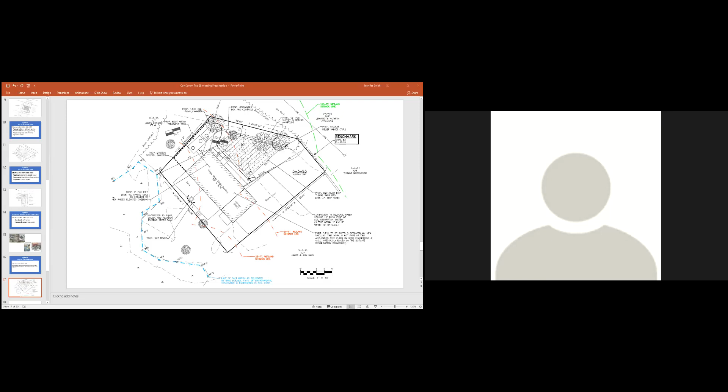Yes, this is Greg. So this is a request for an amendment. We had permitted last year a new septic system at this property, that's what's shown on the screen here. We've since changed the design. It's largely the same, same number of bedrooms, but the septic tanks have been relocated into the front yard, a little further from the wetlands. The leaching field has been changed from a drip dispersal system to a more conventional type of septic system. It's the same scope of the project, same impact to the resource area. We felt it would be appropriate for an amendment, so we submitted a revised plan and a request.

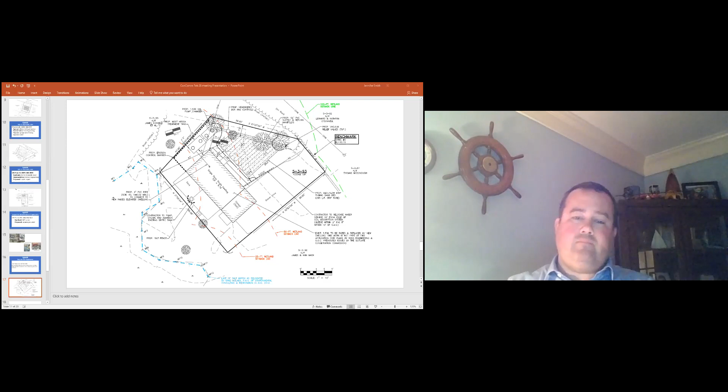Okay, Amy, do we have to advertise that? Yes, it needs to be advertised for a public hearing, so we can get that on for the next meeting, actually the second meeting in March. So I guess tonight you're just asking us, Greg, if it's something we would consider.

Does anybody have any objection to that? None from me. None. No. Okay, you'll still have a chance to hear it and all that, just if someone had any real concern, give Greg a little heads up, but I think that's reasonable.

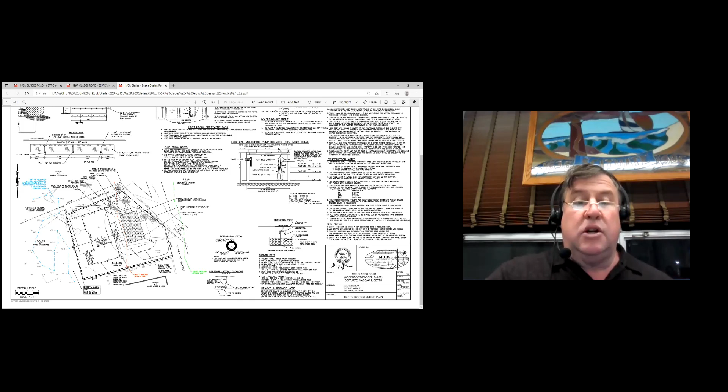Do we need to vote on this, Frank? No, really this is just an informal discussion, and it's going to come to us as an amendment on the 21st. Yep, just administrative. Okay, sounds good. Alright, good, thank you.

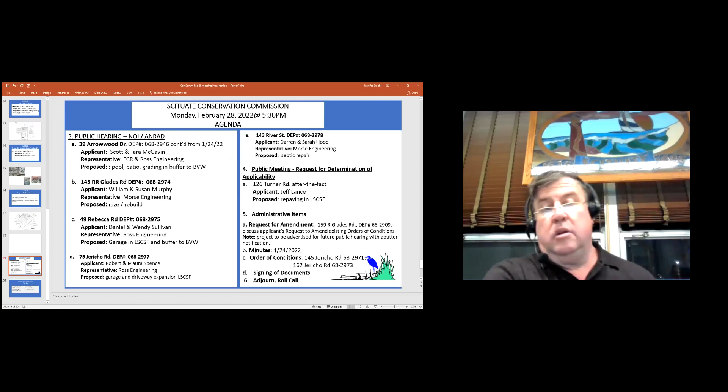Minutes. I read 'em. I make a motion we accept the minutes of the 24th as written. Second, all in favor?

Jen, yes. Andy, yes. Brendan, yes. Frank, yes.

Okay, and we have orders of condition for 145 Jericho and 162 Jericho. I make a motion we accept both orders of condition as written.

Can I get a second? Second, Andy. Second from Andy. All in favor? Richard, yes. Jen, yep. Brendan, yes. Frank, yes.

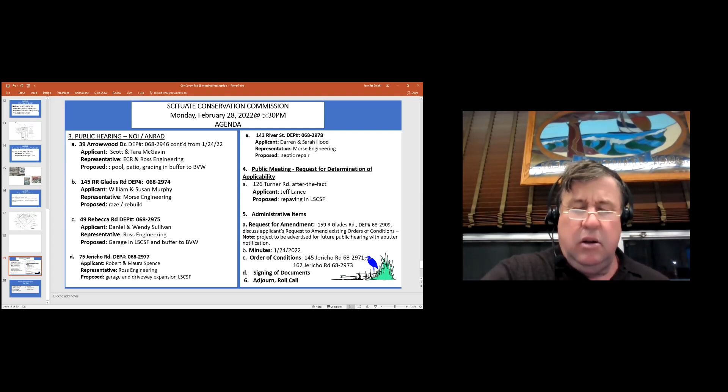Yeah, were you good for Wednesday, Frank? And Andy maybe too? Yeah, I think so. Yes. Okay, perfect, awesome. What was the time on that? 12:30. 12:30 Wednesday. Okay, great.

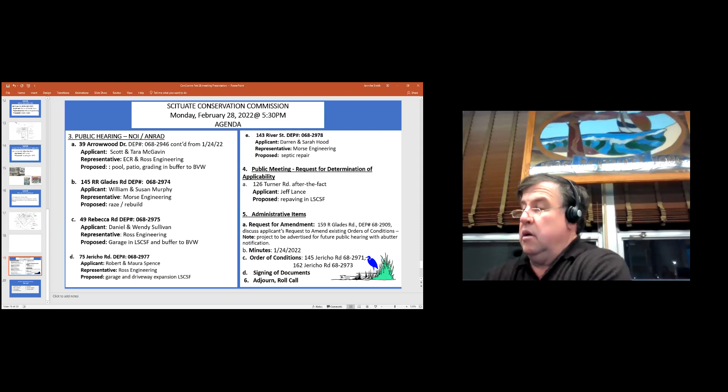I snowshoed yesterday all around Appleton, Crosby, and it was a great walk in the woods. Looks good out there. Maybe someday, Jen, we'll round up these scouts and get the signs up. Maybe.

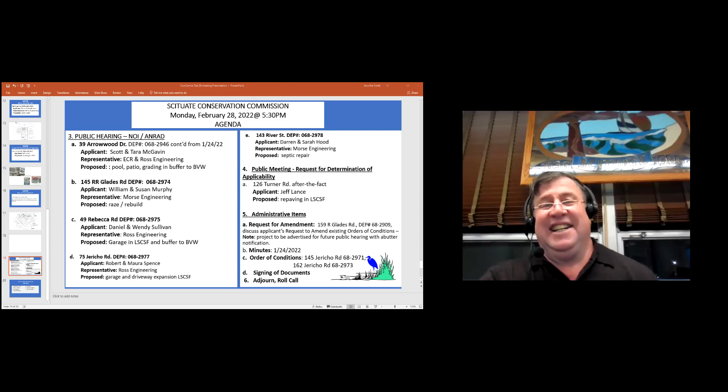All right, what was that, Penny? You heard me. Okay, she said thank you for all your help, Frank. Yeah, that's what.

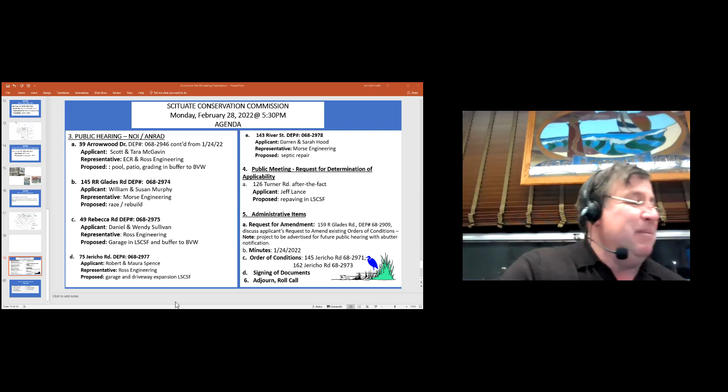Alright, anybody make a motion to adjourn? I like that one. Second. Okay, all in favor? Jen? Yep. Andy? Yeah. Brendan? Yes. Frank, yes. Great, thanks so much.